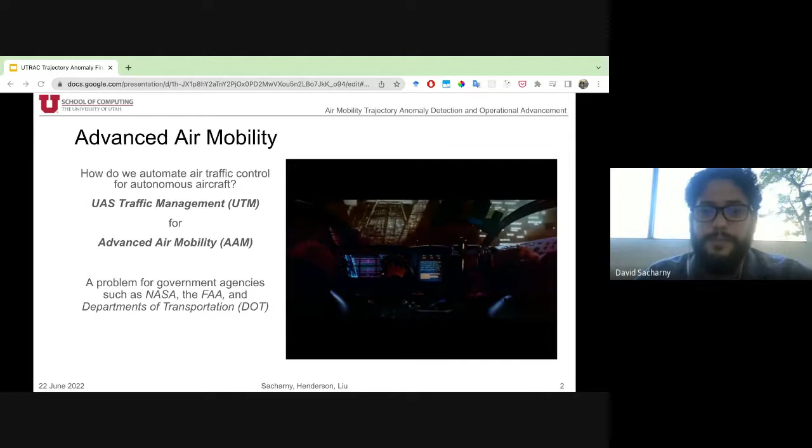So advanced air mobility references a general mission to help emerging aviation markets safely develop an air transportation system that moves people and cargo between places previously underserved by aviation. And it uses revolutionary new aircraft that are only now just becoming possible. One of the major hurdles is automating air traffic control. And one of the sub-problems to consider within that is how to detect anomalous flight operations. So this is the main subject of this project.

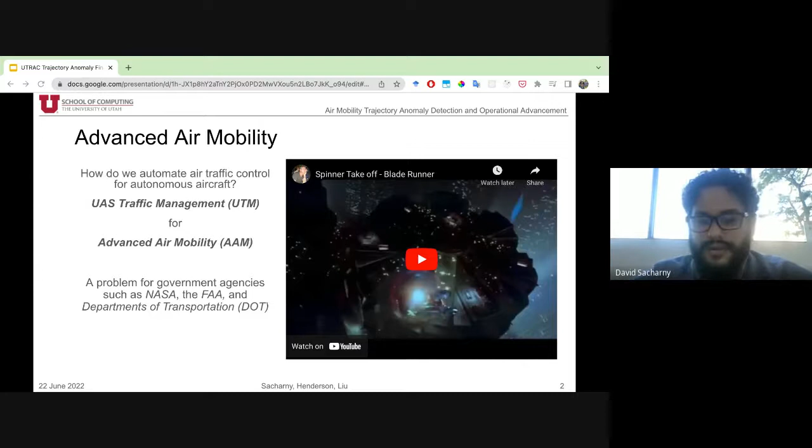And you can see here I have a video of Blade Runner, and you can see these flying cars kind of swerving through all of the buildings. This was really what was in our mind when we started this project: how would this actually work? And what is the role of local government and federal government, and how they're going to control this aspect of this new transportation system.

So the main project goals: we wanted to look at the impact of different virtual highway configurations. So just like in that Blade Runner video, you have all of these basically virtual highways that weave between the buildings. And so we designed these virtual highways and said, what are the different aspects to consider when you're building these things. We looked at the impact of tactical contingency response.

So if there is an issue and the aircraft cannot follow their intended trajectory, what is the effect on the total system? And we looked into an investigation on trajectory anomaly detection using what we call the lane-based approach. So once you have this system going, how do you know that it's operating correctly? How do you detect problems? And then how do you classify those problems? Is it a normal issue that's related to normal operations? Maybe it's a weather event, or is there something actually wrong with the vehicle, or has the system been hacked? These sorts of issues.

Some more background on where NASA, the FAA, and industry are on this problem. So in 2019, NASA published an RFP looking for industry partners to collaborate on airspace simulations and software development. And we were actually working with UDOT at the time. Our research group was invited to working group discussions at the aeronautics department. And I wanted to make sure that we had all the information. And so I started a company called GeoRq and applied and was accepted into this Advanced Air Mobility National Campaign.

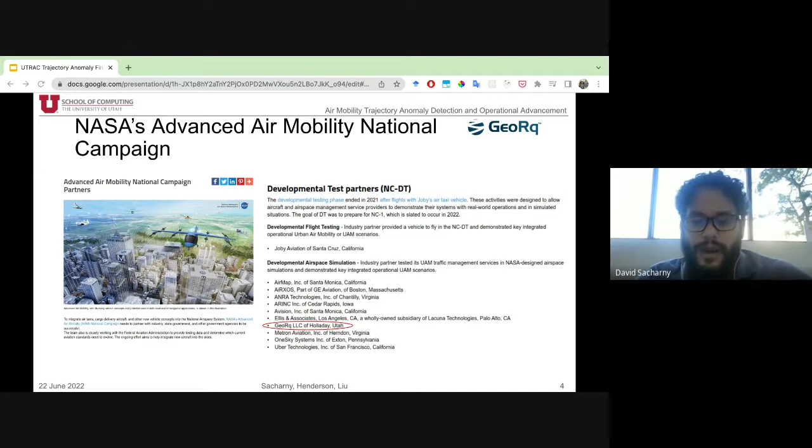So we wanted to be able to answer all those questions, and it seemed like, at least from an engineering perspective, what was being proposed by the government was too complex to be able to answer those questions. So underlying the proposed system for coordinating airspace is a concept called strategic deconfliction. Basically, before you fly, you have to make sure that your trajectory is conflict-free. So here's an overview of how this proposed system functions.

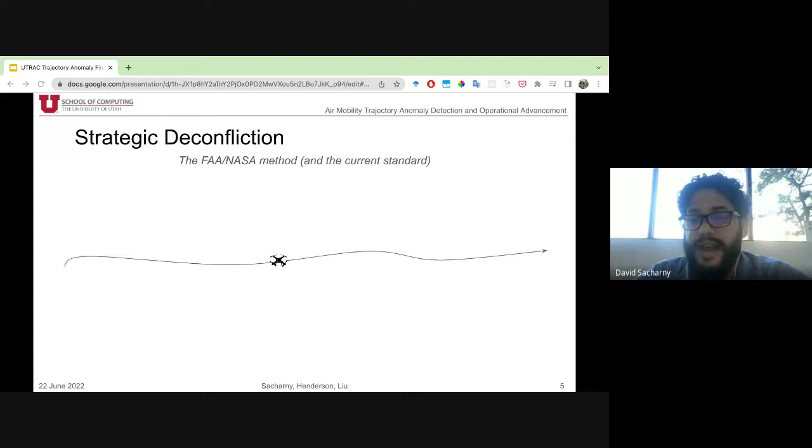So imagine a UAS, unmanned or uncrewed aircraft system, would like to plan a trajectory through the airspace. To ensure that its flight does not conflict with any other aircraft, it must reserve the airspace along this trajectory. So first, it takes the trajectory and it makes blocks out of it. And these blocks are defined by a square or any sort of polygon in 2 dimensions, and then an interval in altitudes and an interval in time.

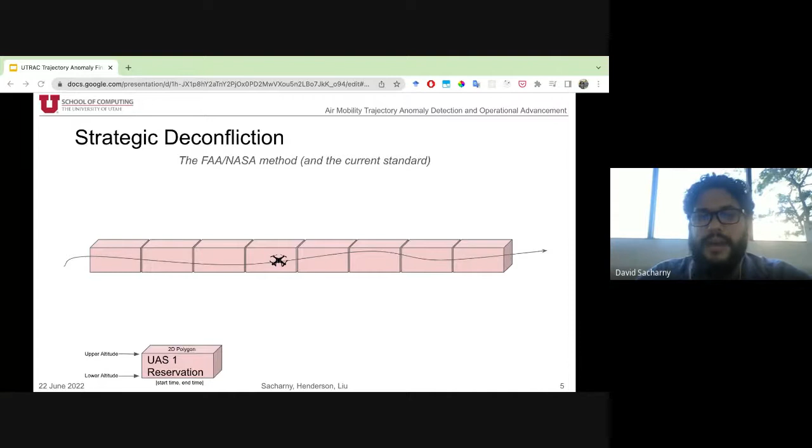The UTM architecture, and UTM is the UAS traffic management system, is what's being proposed by NASA and the FAA. The UTM architecture has a number of delegated authorities which are approved by the FAA to reserve airspace. These are the UAS service supplier, or USS, for small UAS under 400 feet altitude, or a provider of services for urban air mobility, or PSU, for UAS operating in airspace over 400 feet. I'll use the two interchangeably because really they are derived from each other. They are being developed in parallel, and they share a lot of similar aspects.

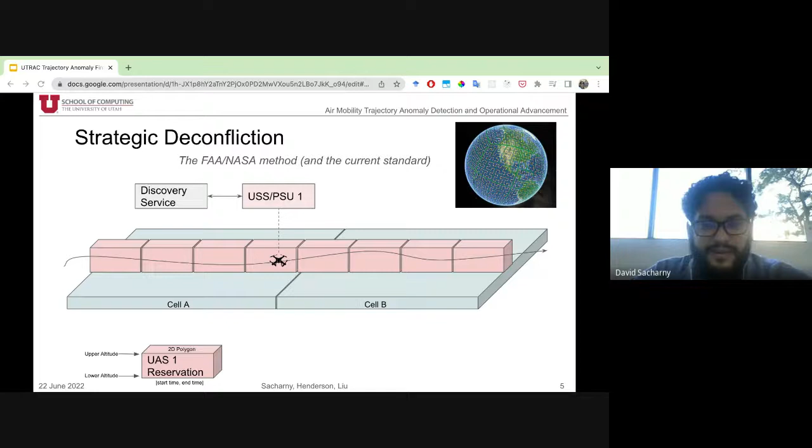So you want to reserve this airspace. So the operator contacts its associated USS, which then contacts a discovery service. The discovery service is, let's see if I have it here. Oh yeah, discovery service on the left. The discovery service maintains a database that divides the Earth up into what are called S2 cells. And you'll see the little depiction there on the right. And it enables the USS or PSU to look up any other operation that may pose a conflict, one that you might run into given your proposed trajectory.

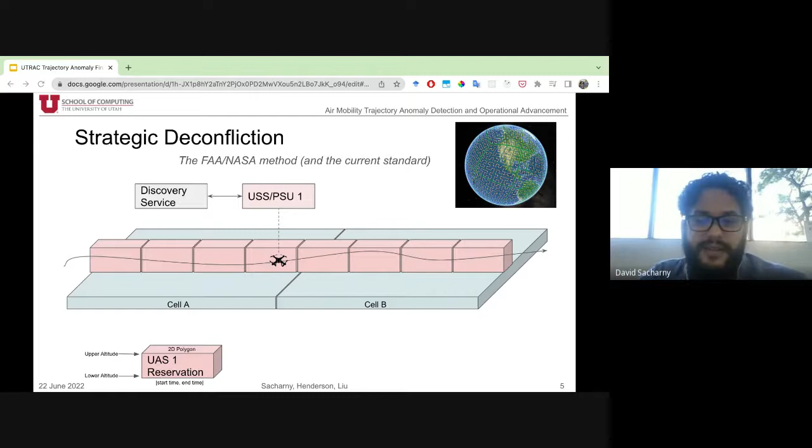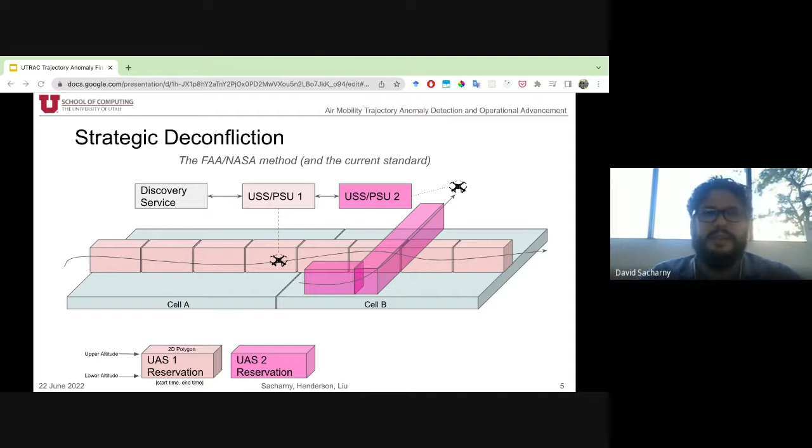If a conflict exists, the operator must contact the associated PSU or USS of the other aircraft and request all of their reservation volumes in that cell of interest. Okay, so then once that happens, the operator is responsible for deconflicting its proposed trajectory with every other proposed trajectory. So you can see it's a fairly convoluted process. A lot of this seems to come from the desire to have these delegated authorities, these approved entities that allow this air traffic control coordination to happen. It's kind of a replacement for human air traffic control, right? There's no tower in this case. There's just some system that allows this coordination to happen.

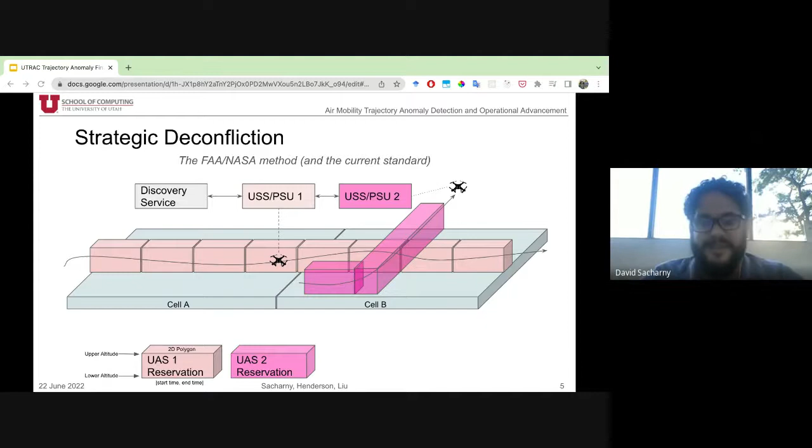So there were a lot of things that they were considering, and what we ended up with was a rather complex system, one where it's very difficult to answer questions like how many aircraft can fly at the same time. What is the airspace going to look like? And so that's what we're trying to address. So the dimensions of each of these reservation volumes that I mentioned, you have to chunk your trajectory, and the shape of the collection of them is really at the discretion of the operator. And that's, again, one of the reasons why it's very difficult to tell what the airspace is going to look like, because this is not a standardized process.

You can choose a very small number of or small volumes so that you can approximate some very curvy trajectory, or you can do big chunks that essentially reserve the entire airspace for all of that time that you're flying. And so that's a very inefficient way of doing this. So it might make sense for, say, hobbyists or inspection applications where you would reserve, say, a large volume around a bridge or something. But for transportation, it doesn't really make sense.

It's like if you were to get up in the morning and you wanted to drive to work and you reserved all of the roads that you took to work for the complete amount of time that it took you to get there. It just doesn't really make sense to do that. It's not very efficient, and there are no rules about how you would do that sort of reservation.

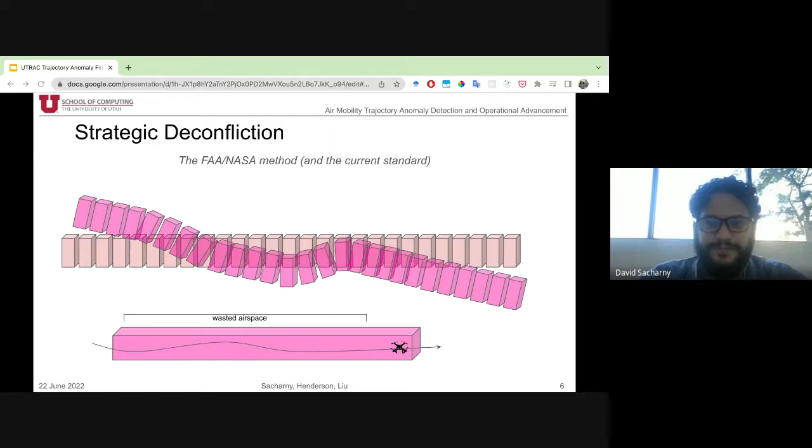So here's our solution for controlling this autonomous air traffic system. We structure the airspace by a network of virtual lanes, which are three-dimensional structures that constrain the possible paths through the airspace. Trajectories are then reserved according to a common algorithm, a common recipe. This combination of features makes the overall system behavior much more predictable.

We can interrogate the airspace using tools from ground transportation, which is one of the main inspirations for this type of system, and tools like network analysis, rather than simulating an endless number of possible trajectories and collections of trajectories, which is what the current system would need in order to answer any of those very simple, straightforward questions.

So the idea of this lane-based approach came about during those working group discussions that I mentioned before, that began in the fall of 2018. The director, Jared Esselman, brought up possibly restricting low-altitude UAS to the airspace above roads for a number of practical and political reasons. Additionally, many questions were raised about how many operations could be supported and what infrastructure was required.

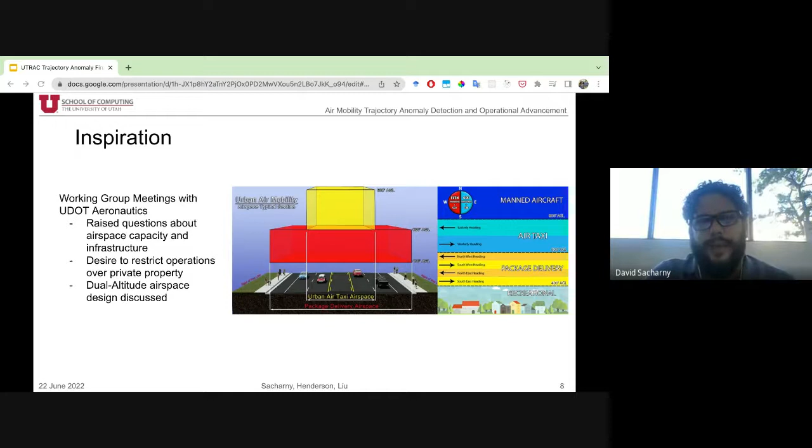Really, the people that are entering and exiting the roundabouts are able to make these decisions without much work, right? It doesn't take much effort. You're just looking in one place to see where that vehicle is going to intersect, and you can say yes or no, I can go or I can't. So the idea was, let's try to reduce the problem of coordinating this airspace access by taking inspiration from these types of intersections that don't require all this heavy external equipment to coordinate that access.

We have these very efficient diagrams we call space-time diagrams. They're used for ground transportation engineering, and we are, I believe, the first to apply them to an airspace coordination system. So a little bit more about what these lanes really are.

We maintain minimum separation between aircraft in the direction of travel, and that's specified as a headway distance, same as for ground traffic. And that's a parameter that can be individually specified by the aircraft if they need, if they have hazardous materials and need extra space, or they're a slow-moving aircraft or they're having an issue. But it could also be specified by governments, regulators. So this was one of the main reasons why we thought this would be a system that we could use to answer a lot of these questions about airspace access.

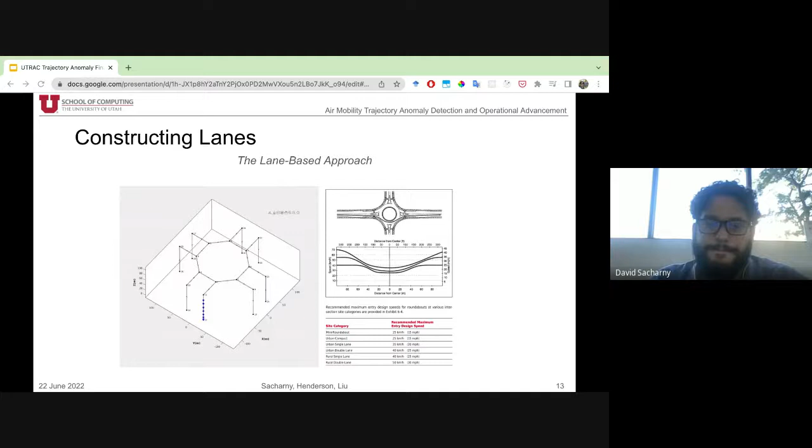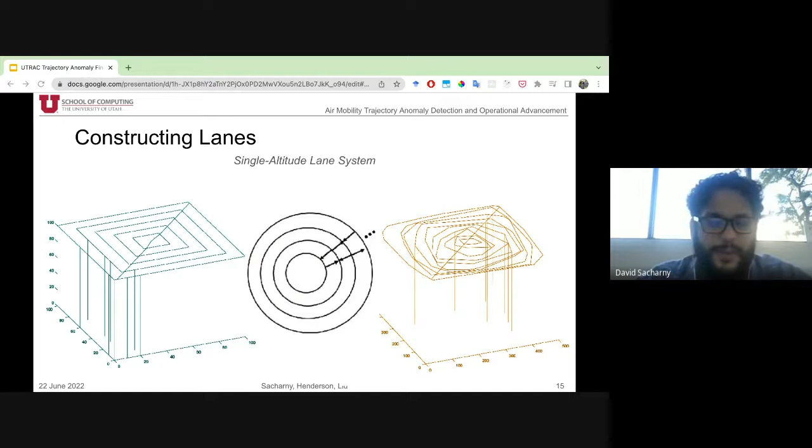We've done some work in constructing different lane systems. So here's an example of a lane system over San Francisco. We did 2 altitudes here, so they travel in 2 directions, and then we have these roundabouts that are at intersection points. We've also looked at single altitude lanes. It presents different types of issues there because you can't get everywhere unless it's a certain type of network. And so we've explored the single altitude lanes as well.

We've done some development for these prototype systems in Dubai, where they were testing a Volocopter system there. And so it's easy to say, hey, where are they going to fly? We'll design a lane system, and here's how you use it.

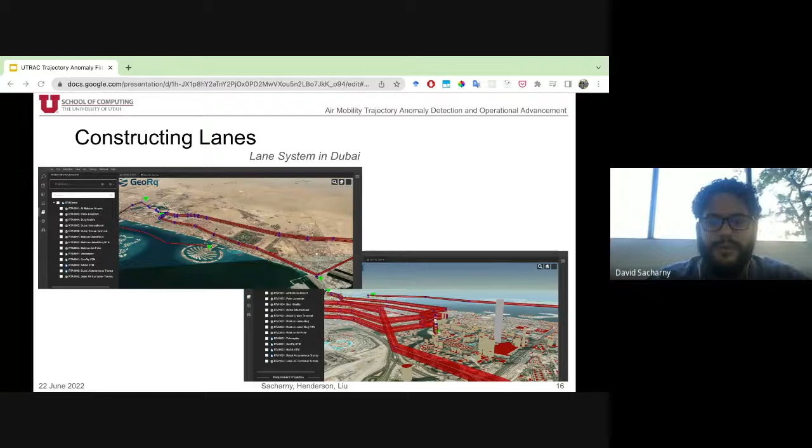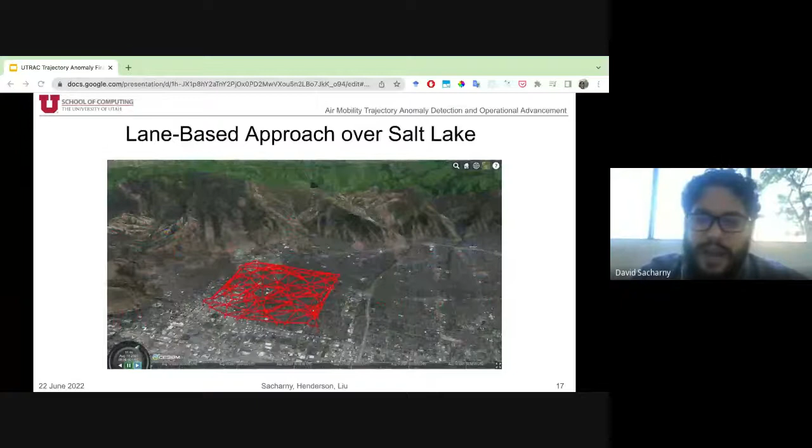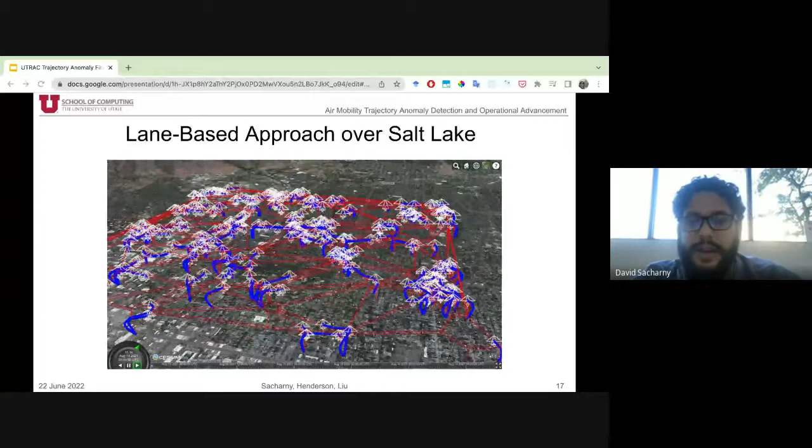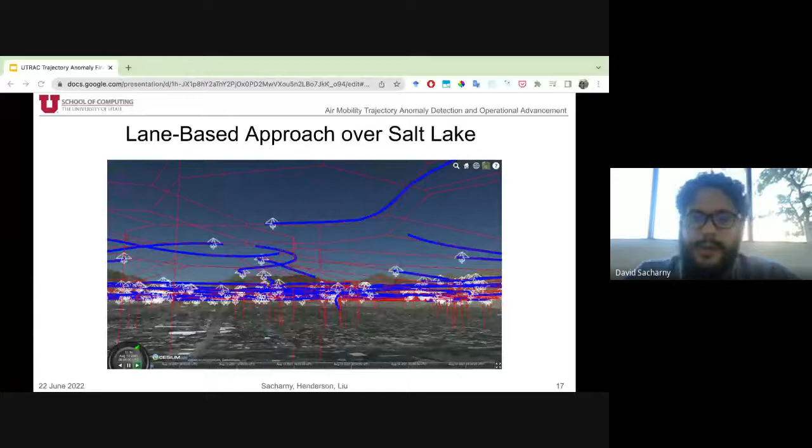And here you can see these kind of white hang gliders represent UAS flying about 400 feet above the ground to and from those locations. And they're scheduled according to that 2-step simple procedure that we described earlier. The interface that you're seeing here was developed as part of this sponsored project by UTRAC, and we're continuing to develop this interface. So a little bit about the structure and the comparisons of different structures that we looked at.

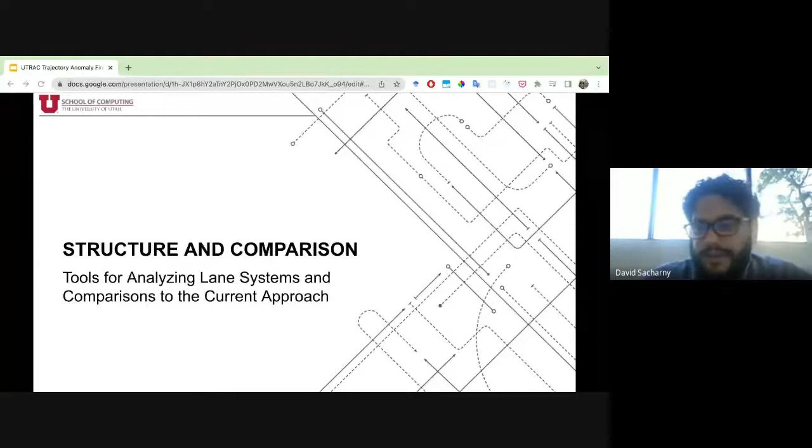So the nice thing about this lane-based system, where we predefine all of the possible routes, is that it supports an analysis before even simulating it. You can tell certain things about how the system is going to behave just based on how things are connected. And so we looked at a couple different things here.

As an example, we compared it to this kind of free flight model that FAA and NASA are proposing, which is basically as the crow flies. Everyone flies straight shot to where they want to go. And we looked at that in comparison to a number of different spatial networks. So it turns out that these free flight, as the crow flies type models, create congestion points in the center of these density zones, so wherever things are trying to cross.

So if you were looking at an urban city, and say a lot of the vertiports were outside of the city and some were on top of buildings, you would find that there would be congestion points. Even though there aren't roads up there, there would be a lot of conflicts generated in the center of that. And there's no way to control that given the current proposed system. But with the lane-based approach, you can say, okay, we're going to separate this, and we're going to move traffic around in this area.

Just imagine if you could take our current road network and instantly redefine how they are connected. Obviously, that would give us a great deal of control over traffic situations. So it's the same idea here.

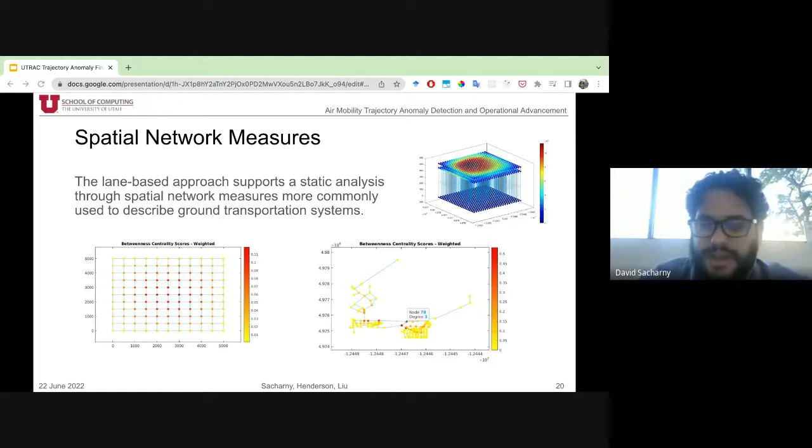We looked at some other spatial network measures that give us an indication of whether there's going to be congestion in a given area. I mentioned before that we were able to take the ground network underneath and actually create an airspace structure from that. And you can see that in the bottom right graph there. It's actually a depiction of an area in Salt Lake that we tested. And if we just took that network as is, there are certain areas that would likely experience more congestion than others, just based on how the network is structured.

So what are the things that we're interested in about these networks, and how do we measure them? We came up with a couple of measures. First was this failed flights measure, which is like a canceled flight. You go to the airport, and for whatever external reasons, weather or whatever, you're not able to take that flight. It's canceled. You have to go home. That's a failed flight. These failed flights in our simulations are associated with the congestion itself. So if an aircraft cannot get a path where they want to go at the time that they want to go, then that is considered a failed flight.

Then there is delay, which is the amount of time between when you want to launch and when you're actually allowed to launch, based on the amount of traffic. And then deconfliction time is a measure of how easy it is to compute your trajectory. So in the NASA system, for example, you have to deconflict, check every other trajectory before you take off. It's like getting up in the morning and looking at Google Maps.

You want to go to work, and you have to basically register with every other person on the road and make sure that they're not going to cross your path at the time you're driving through. So you can imagine that gets harder and harder as there are more people on the roads. It's the same when there's more aircraft in the air. That kind of effort required is the measure of deconfliction time.

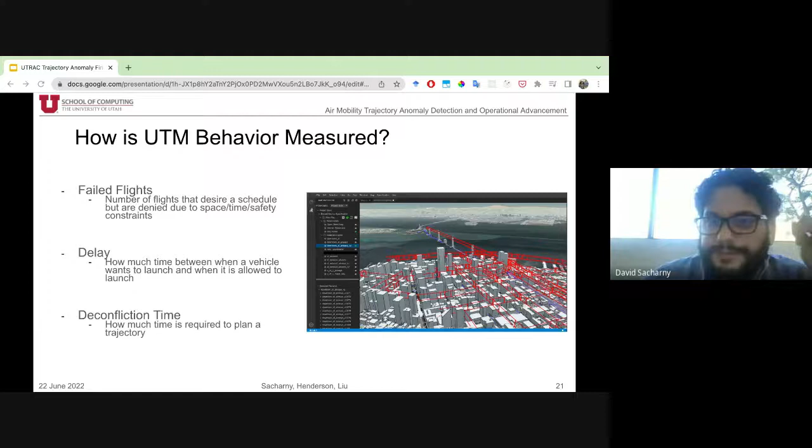It's like if you want to take off at 12 p.m., how flexible are you on that time? Could you take off at 12:15? Could you take off at 6 p.m.?

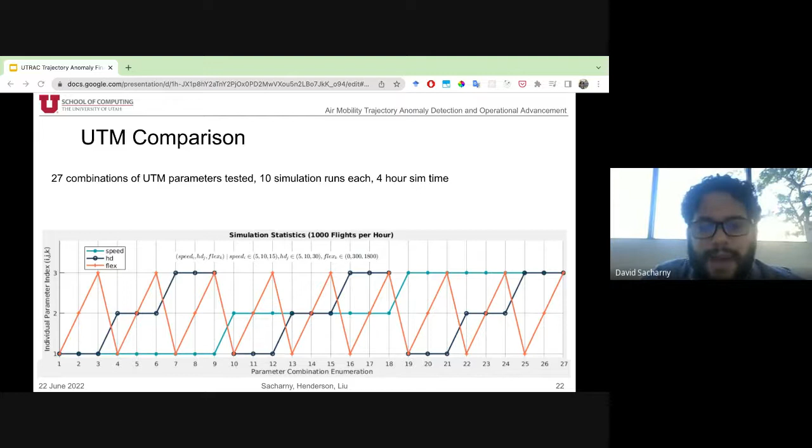Right, that's the flex. So we modified all these parameters to see how that affected the system. What you're seeing here is every combination of those three parameters given a couple different values we added. I'll give you the high level here, but essentially for failed flights, some of the systems performed better than others based on how they are structured.

One example is if we took San Francisco roads and just lifted them into the air and used that as a system, well, that doesn't work very well. It's actually very sensitive to these parameters. If you change the flex just a little bit, everybody gets canceled. If you change the speed just a little bit, people get canceled.

They will still allow a lot of different things to happen, which means that, for example, in the case of some weather events, local authorities have new sensors and can tell that there's going to be a huge gust of wind through Emigration Canyon. Well, let's increase the headway distance of all the aircraft. But how much do you increase it before you cause a problem? If you increase that headway distance just a little bit for an FAA type system, that's going to have a huge effect. People are going to get dropped, their flights are going to get delayed, all of these things. With our system, however, that's not necessarily true. You would have more flexibility in setting those parameters.

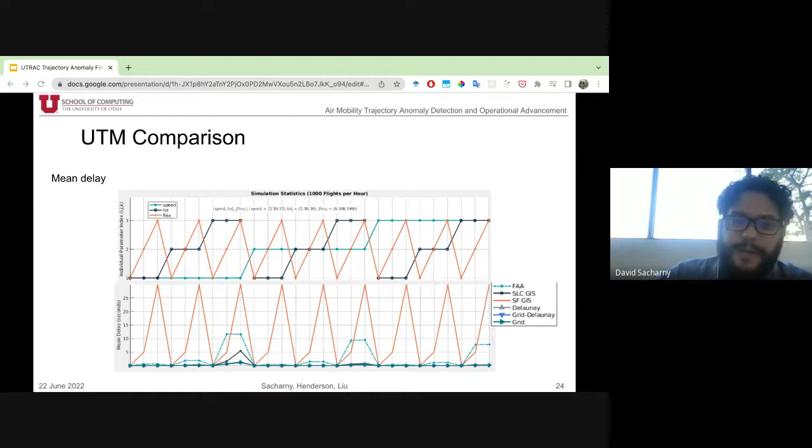We looked at delay as well, and it has a similar response. You get a lot more delay when you change those parameters for certain types of air networks. San Francisco is pretty bad, just given their road network — it's very dense and has a lot of choke points. The FAA system also had similar issues with delay.

So overall, low flex — if people are less flexible with their times — low speed, so everyone's flying slowly, and high headway, meaning everyone's spaced apart, means you're going to have less airspace capacity. As I said, the FAA and that San Francisco model are most sensitive to that, but many of the other systems are not.

A little bit about contingencies. Contingencies are unplanned events that you have to plan for now. This would be, for example, a system failure on your vehicle, or a gust of wind. These are all contingencies that were unplanned for, and so you have to do something, and it's going to affect the system.

And we came up with a recipe for dealing with those types of situations. Again, our goal was to make it as simple as possible, so we could implement this in a couple lines of C++ or whatever the code on that system is, and it would perform as expected. It's not a giant coordinated effort. Basically, you're going to be looking at the aircraft in front of you. If you're unable to get communication systems, you'll use your sensors and ask, am I getting too close? And you'll slow down, and you have to communicate that to other aircraft. If you do what we say here, it's a pretty stable system that will be able to deal with a fair number of contingencies, and the intensity of those contingencies.

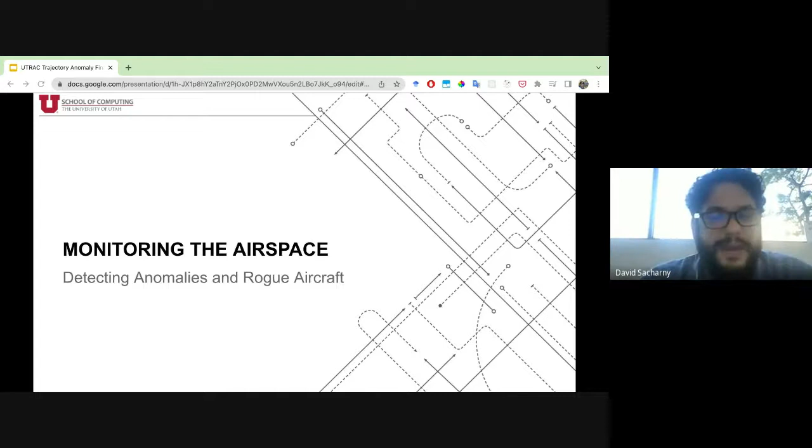So, you know, air traffic controllers have the ability to use radar and these types of systems, and you can also set up ADS-B, which many aircraft, at least commercial aircraft, are required to have. These transmitters transmit their location once a second, and you can put a radio on your roof and see all of the aircraft and all of their positions flying over your house.

So the question, though, is could you use all of that data and tell when something's wrong? Well, if you have all of the trajectory information, all of the operational intent of those aircraft, then it may be possible, but it's difficult, because you have to compare all of this information. There's a lot of data to crunch there to figure out whether something's wrong.

Well, with the lane-based approach, we have a system that we've predefined. We predefined all of the areas, and that's basically a model of what the airspace is supposed to look like at any given time. We can use that to test for anomalies. So when you get a new data point in, you ask, does it match my model of the airspace? It's a very simple program. We wrote the program and tested it out.

And the nice thing about it is that you can also classify these anomalies. So the idea is, once you get that information, how do you know whether it's maybe a hobbyist that flew out of their zone, or whether it's an aircraft that's not responding and not cooperative, or could it be any other reason?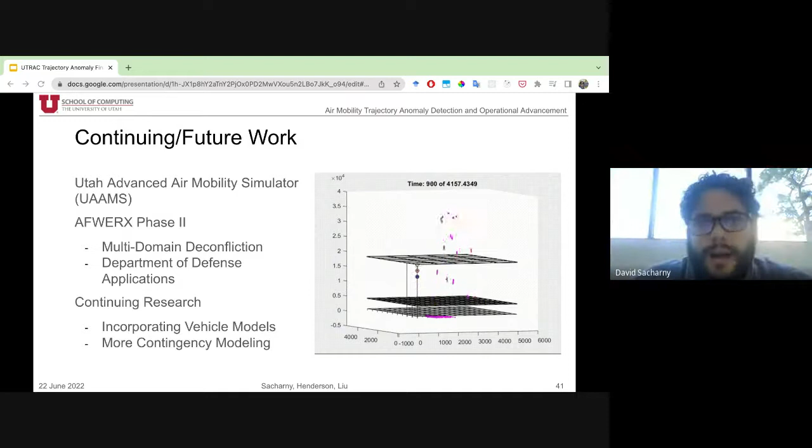But these situations are still not greatly handled. I mean, what are you supposed to do in those situations? And so that's really where I think this has to go, is to figure out exactly what they need to do. Because if there's a lot of aircraft in the air, then doing what those aircraft were doing, which is just blindly following a circle, can cause a serious issue. So with that is my presentation.